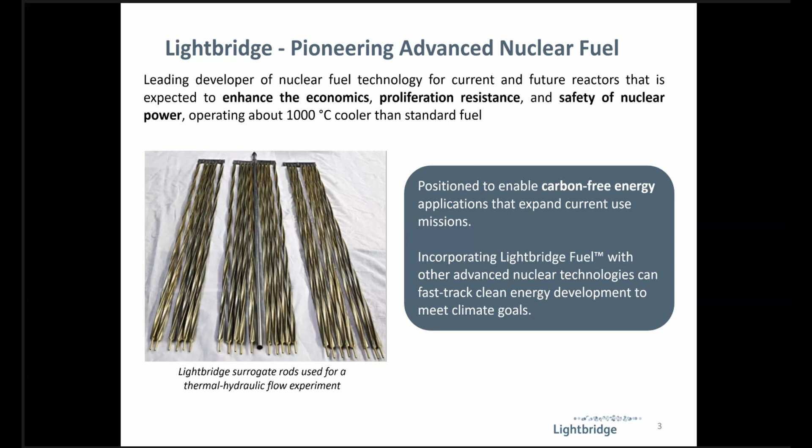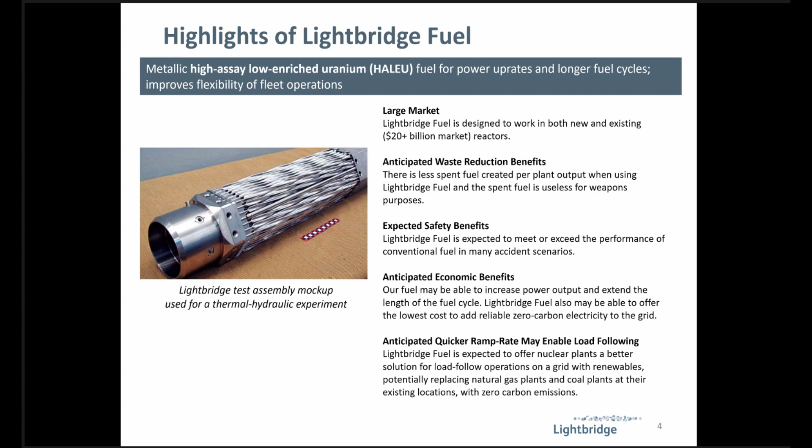This is a picture of a mock-up of a fuel assembly. We are designing for many different types of reactors—this is for a Russian VVER type reactor, a variant of a pressurized water reactor. The fuel rods are optimized for each different kind of reactor. For example, here you can see one of the rods we designed, which went through some testing. This is a cross-section of one of the rods for a VVER, where we have 3 lobes. For a PWR, a Western, say Westinghouse type reactor like Seabrook, this would have 4 lobes instead of 3, looking more like a plus sign.

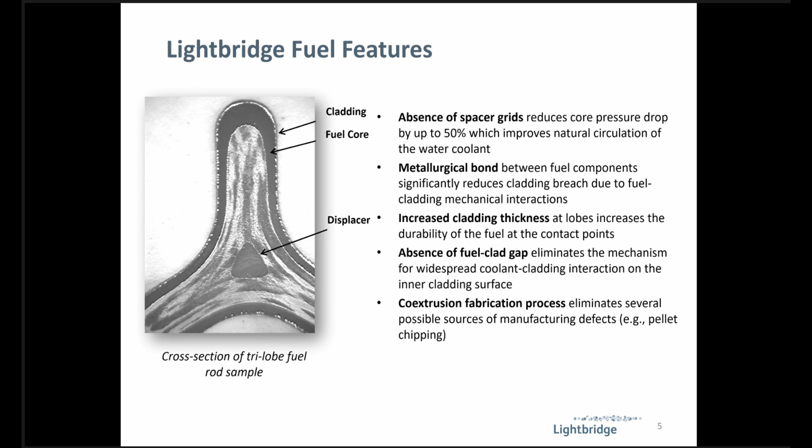One of the many benefits we've designed for is no spacer grids. To hold the rods together in the core of the reactor, there are no grid straps, no spacer grids that block the water flow. That is partly responsible for the power increase—the water just flows much more unimpeded from the bottom through the top of the fuel assembly and around again.

This shows the temperature difference down the center line of the reactor, some of the safety benefits it brings. That link on the bottom right is current on the US Nuclear Regulatory Commission's website, describing this fuel—it includes a significant increase in fuel thermal conductivity compared to ceramics, promotes lower operating temperatures, and complete retention of fission products, meaning no burst release of these products upon cladding failure. No one else will be able to provide that, in addition to safety features for the reactor that also help with radiation exposure for plant employees.

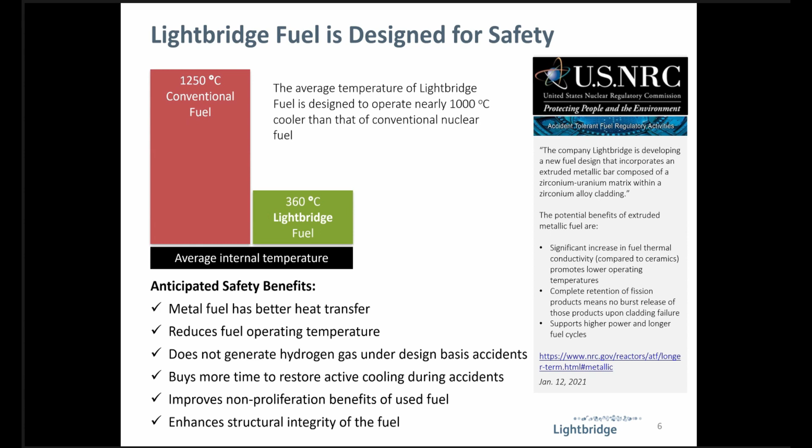And doing all this while actually bringing higher power and longer fuel cycles to the reactors. We have designed the fuel and patented it. We've also designed and patented the manufacturing methods for this fuel.

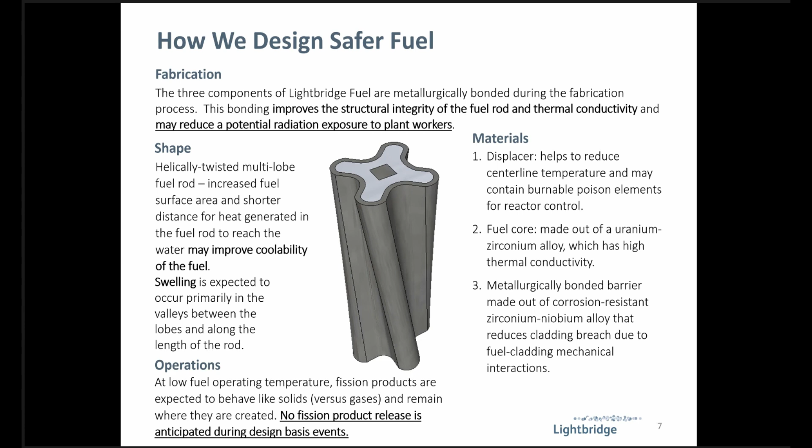As you know, capacity factors are very different for different energy sources. The renewables are quite intermittent, as the wind blows and the sun shines. Nuclear has the greatest capacity factor—think of capacity factor as if the plant can run at 100% of the time, 24 hours a day, every day of the year.

Fleet-wide, nationally in the United States, nuclear capacity factor is about 92.7%. Some of the reactors are over 95%. Virtually all of that downtime is planned years in advance for the spring or the fall when the power isn't needed as much, and the reactors can be refueled and have maintenance on them.

But the utilities want to increase these capacity factors more, including the ones we've been working with, by lengthening the fuel cycle and by allowing a much quicker ramp up from an outage to full power and a much quicker ramp down than you can do with pellet and tube fuel, which goes up and down in power very slowly. This also increases the capacity factor by getting the reactor up from outage quickly and back down into the next one.

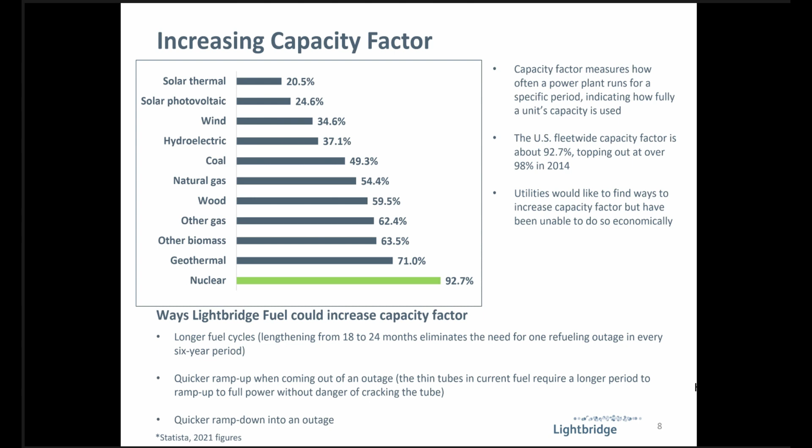And the next outage will be 24 months later instead of 18 months later. So the reactor is running for quite a bit of time that it would have been shut down for an outage. Some of our recent fuel development milestones are really centered around that.

If you want to get ahead in nuclear in the United States, you really need to partner with the US government to access facilities, materials, and receive funding support.

We announced in December a long-term strategic partnership project with Idaho National Laboratory and the US Department of Energy. We are now manufacturing fuel coupon samples that we will irradiate in the Advanced Test Reactor at Idaho National Lab.

The data will support the fuel performance modeling and regulatory licensing efforts at the Nuclear Regulatory Commission, as well as at nuclear utilities and fuel fabricator companies.

Under this work at INL, there's just about every quarter a new milestone being announced by Lightbridge, and this is leading to other developments on the commercialization path to the fuel.

The fuel can be used in all the variants of pressurized water reactors, boiling water reactors, and as we're going through this testing program at the Advanced Test Reactor and also at the TREAT Reactor for transient testing, including accident type testing, that's helping to guide the commercialization path of which types of reactors exactly first, and which reactors, even within those groups, are being prioritized for first commercialization.

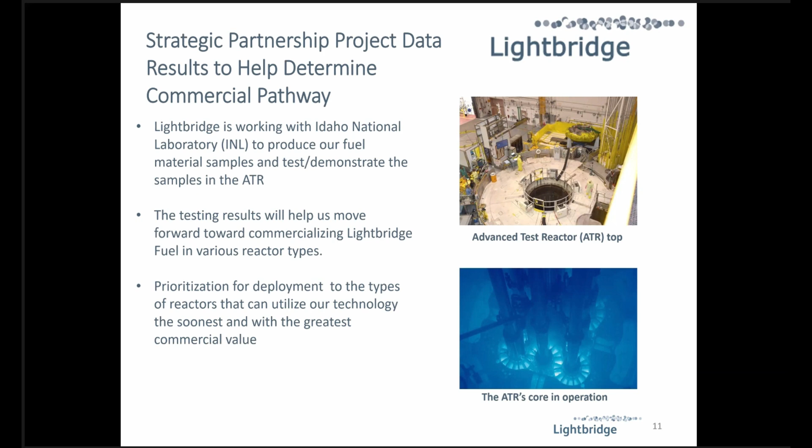The top photo here is the canal at the Advanced Test Reactor, and paths that will come from this are the pressurized heavy water reactors like CANDUs, small modular reactors, light water reactors both pressurized and boiling water, and the existing large reactors and new ones being built in several countries. And they all have advantages for why this fuel might go into them first.

For example, to use the fuel in the CANDU reactors, we would not be using HALEU. We'll use enrichment of uranium higher than the CANDUs now use, but not high assay, low enriched uranium. So for CANDUs, we don't have to wait for commercial supply of HALEU.

We will bring the benefits of HALEU and advanced technologies to the light water reactor SMRs and the large existing reactors, but that supply of HALEU is not commercially available yet. But the US government, working with allies, is very seriously working towards solving that problem and having more enrichment in the US and in allies available in the coming years.

And in particular, there's a demonstration project at Centrus in Ohio happening now, another pure nuclear publicly traded company, and Urenco at their plant in New Mexico is adding 15% to their enrichment capacity, and they're looking into adding more capacity in their European plants.

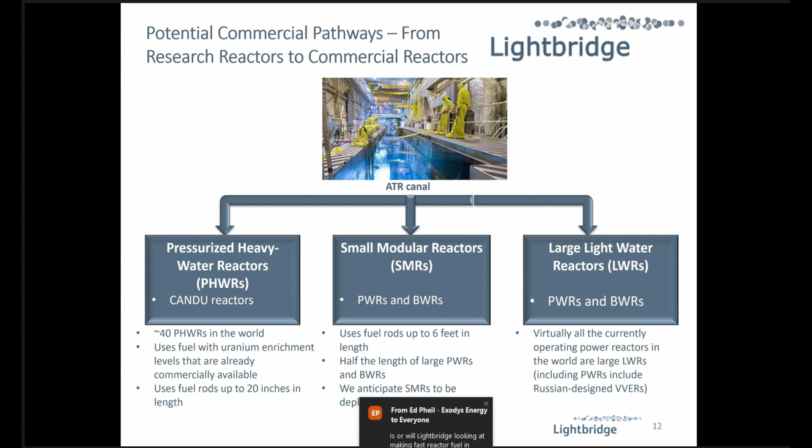One of our new and growing collaborations with the US Department of Energy is that we have a nuclear energy university program grant of $800,000 from DOE to MIT, under which MIT is studying accident-tolerant fuels for light water-cooled small modular reactors and is specifically looking at simulating the performance of Lightbridge fuel for NuScale's SMR.

We're collaborating with NuScale and with MIT together on this. The analysis is looking at promising advanced fuel forms to improve the safety and economics of light water reactor SMRs. We're glad to see MIT, DOE, and NuScale all recognizing Lightbridge fuel for that.

We have a second new nuclear energy university program grant from the DOE as well, $1 million to Texas A&M University that we announced about a month ago, that will also simulate Lightbridge fuel in NuScale's SMR.

More specifically looking at the pressure drop correlations I mentioned, at why the Lightbridge fuel will improve the economics of SMRs, we believe, quite dramatically. This program also helps train the next generation of engineering students to use advanced multi-scale, multi-physics simulation tools, and we're glad to see them learning that in relation to Lightbridge fuel in a NuScale SMR.

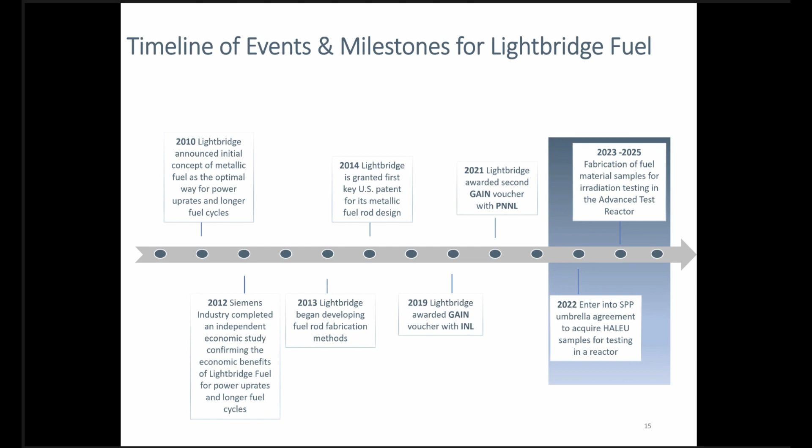So we're glad to be part of the US effort to advance nuclear technology. And Lightbridge, we believe, supported by the DOE and its national labs, will play a significant role in the global energy transition, as I mentioned earlier, really helping the SMRs and the existing reactors powered by this new fuel really meet their potential.

And the Lightbridge fuel will bring to these SMRs the same benefits that we bring to large reactors, but we believe, and this is what some of the studies going on now we think will show, that the benefits to SMRs will be even greater, including, say, for those pressure drop reasons. A lot of SMRs don't rely as much on the power of large pumps as on natural circulation, and not having spacer grids and grid straps and easier water flow, we think will make the Lightbridge fuel even better for SMRs than for the existing large reactors.

But we're glad to see, I think in some surprising ways, more large reactors being ordered and built in the world than a lot of people had expected. I think it's not going to be just SMRs going forward, although that might be the case in the United States after the next Westinghouse plant at Vogtle, the next AP1000, opens a few months from now. There might not be another new large LWR built in the US for a long time, but I think there will be in many other countries, is what we're seeing, as well as the SMRs here and abroad.

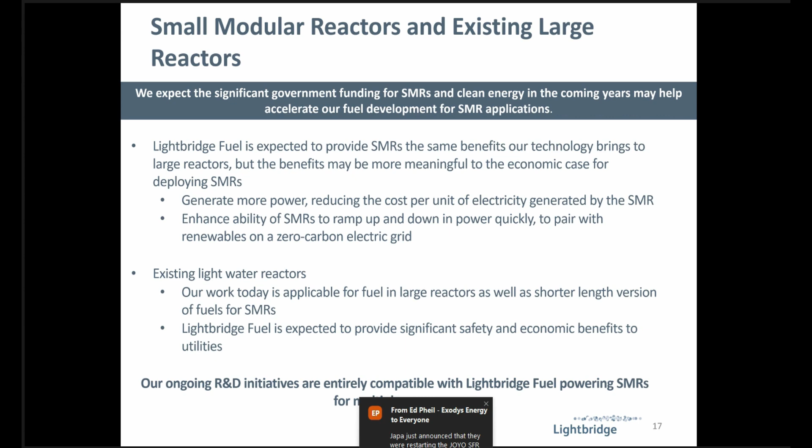And we're carefully following what they're doing, making sure that our fuel is being designed to bring significant benefits to these types of SMRs. Lightbridge is not designing a reactor. Lightbridge will not deploy a reactor. Lightbridge is just about designing and manufacturing fuel.

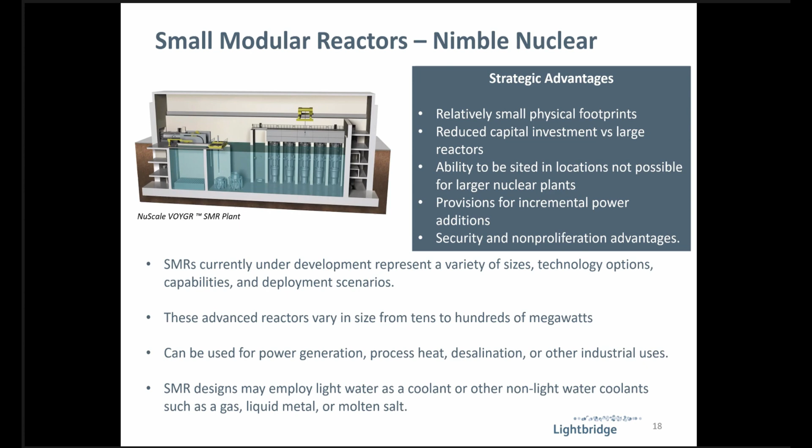And we do intend - we are looking into manufacturing these fuel rods ourselves, although we could also license the technology to companies in other places, or we could potentially produce fuel rods ourselves that are then assembled into fuel assemblies and fuel bundles by existing fuel fabricators that might want to have their own IP on the top plate, the bottom plate, other aspects of the fuel assembly beyond the fuel rods that Lightbridge is designing.

And I think that there's sort of a rollout. No one is sure of the chronology, and some of these will overlap with each other, and many different reactors within each group will be different. But the existing reactors are kind of unique in that they're an existing market of about 400 reactors around the world that could use Lightbridge fuel. If you're developing a new advanced reactor, you don't have anything around the world that could use your stuff - you have to have a new reactor built. Lightbridge has a big existing potential market as we qualify this fuel.

Going into the light water reactor SMRs like NuScale, GE Hitachi BWRX-300, Holtec, and Rolls-Royce and other SMR developers, we think that because these are pressurized water reactors and boiling water reactors with a lot of existing supply chain, and regulators like the NRC understand light water reactor technology, these will be deployed in larger numbers sooner than the next category of advanced reactors, which will probably take longer to deploy in large numbers with regulators understanding them.

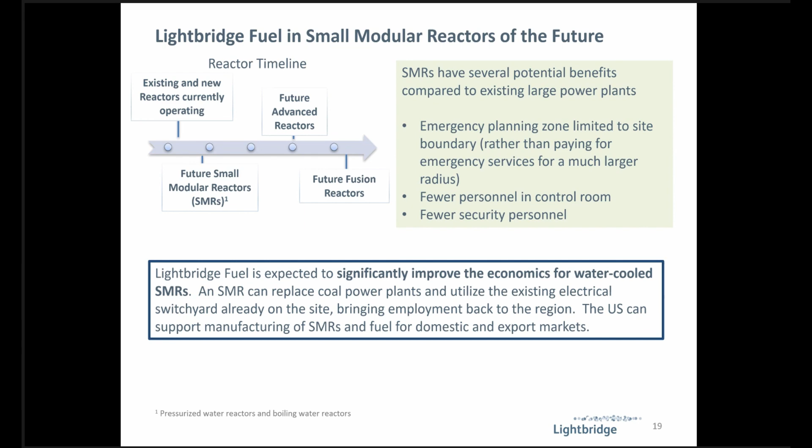This ramp rate for SMRs can be very important for points other than just the economics of coming out of an outage quicker and going into an outage quicker, and therefore having more revenue from selling more power. Right now reactors are terrible at load following, for a lot of reasons, including that the pellet-in-tube uranium dioxide fuel really can't surge down in power or surge up in power quickly. You'll crack that fuel rod if you surge it up in power quickly.

But we believe we'll show that you can, with Lightbridge fuel, in an SMR plant where the other systems are designed to take those increases and decreases in power. And we've already done some things that give us great confidence that this will be the case.

We'll talk a bit more in the next couple of slides about coal to nuclear, but really we're also getting to natural gas to nuclear. If we're really going to have an energy transition and get off emitting CO2, the natural gas plants are going to have to go eventually too.

Right now, one of the biggest drivers for natural gas plants is backing up renewables. In fact, in a lot of places with renewables, there's more power provided by natural gas than energy provided by renewables, because of the intermittency.

If we're going to get to zero carbon grids, I think we'll eventually see SMRs replace those natural gas plants, with Lightbridge fuel really being key, because unlike the current fuel SMRs could use, Lightbridge fuel can surge up and down in power quickly, like gas plants can, as the sun doesn't shine as much and then comes back from behind a cloud, or the wind doesn't blow as much and then comes back. The SMRs could really go up and down in power and load follow on a zero carbon grid with renewables, like natural gas does now.

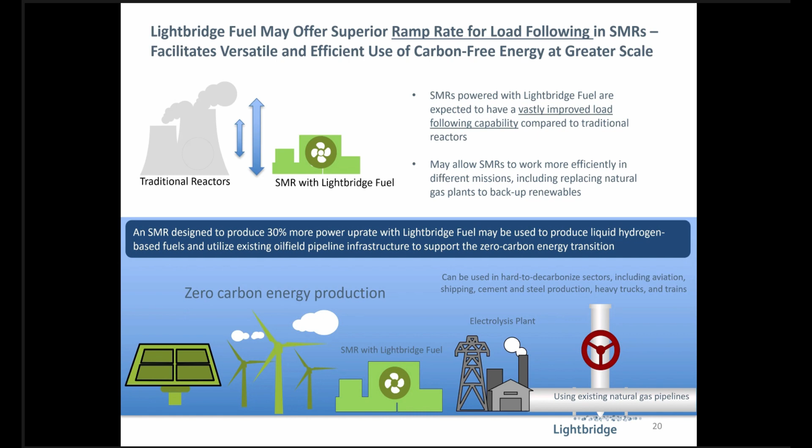This coal to nuclear transition, which I think will also lead to a natural gas to nuclear transition, is very interesting. The Department of Energy published a study in September that showed 80% of retired coal plants have the basic characteristics to serve as sites for SMRs—190 sites around the US.

If you put an SMR on each, that will be almost 200 gigawatts of electricity, which is twice as much nuclear energy as produced in the US today. So if we put an SMR on each of these sites, it would triple the amount of nuclear energy in the United States. It would be a great market, we think, for Lightbridge, and it would really help with decarbonization.

We talk about infrastructure on these sites, and you've heard this from many others as well. There's the electrical switchyard, there's the connection to the electric grid, and there's not the need to build new transmission lines like there is with renewables. There's a great opportunity for savings in putting a new energy source on a coal plant site, or any fossil fuel plant site, and using that infrastructure.

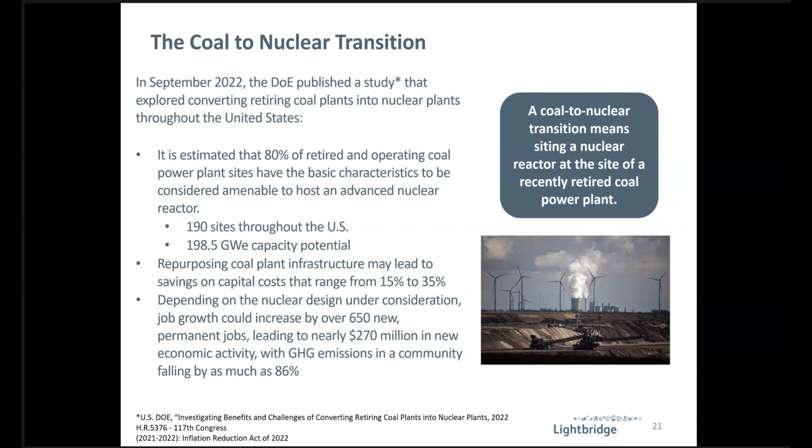And as SMR designs come along, there could even be SMRs that use the existing turbine at the coal plant and generator at the coal plant, in addition to the electrical switchyard and the grid connections there.

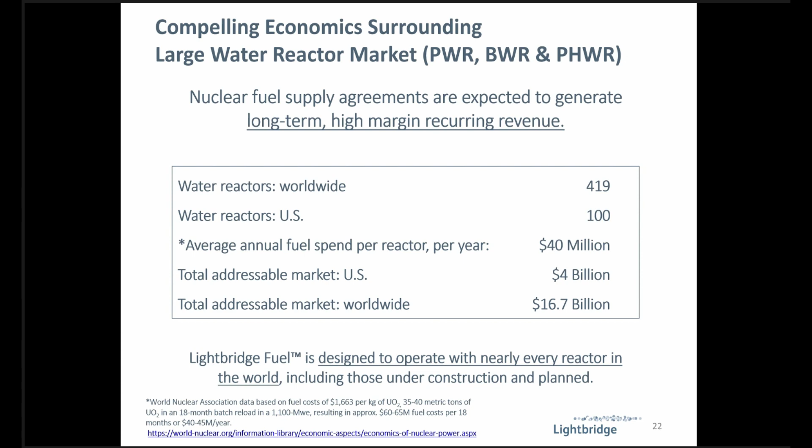We believe there are compelling economics around Lightbridge fuel. There are about 419 water-cooled reactors around the world that we believe could use our fuel that are operating now. 93 of them are operating in the US. When we think about this in terms of levelizing to a standard plant of 1,000 megawatts, a gigawatt, you could think of that as about 100 of those in the US out of about 400 in the world, with about 400 gigawatts electric in the world. The annual fuel spend for a reactor is about $40 million. So the total US addressable market is about $4 billion in fuel spend per year, and worldwide is about $16.7 billion a year in fuel spend. We think that's something that will rise quite significantly if nuclear is to meet its place in helping with the energy transition.

These numbers derive from a study that Siemens did through its subsidiary Pace Global, and some analysis from Lightbridge, on what a typical 1,100 megawatt plant, like Seabrook, a Westinghouse four-loop PWR, would benefit from using Lightbridge fuel. This is using the wholesale power price looking back 10 years, the average over that period. That'll vary by place and by time, but that's what this is based on.

Lightbridge fuel can be used in many ways. You could operate an existing reactor at 17% higher power and not lengthen the fuel cycle, or operate the plant at 10% higher power and increase the fuel cycle from 18 to 24 months. On a new build PWR, you could increase the power output by 30% for the same size core using Lightbridge fuel. These numbers are based on a typical 1,100 megawatt electric Westinghouse-type four-loop PWR uprated 10%, with the cycle lengthened from 18 to 24 months.

This is what most utilities tell us is where their interest lies. From that 10% increase in electricity production on an annualized basis, that would be about a $48 million benefit to the reactor. From increasing the operating cycle from 18 to 24 months, by operating on days when it otherwise would have been shut down for an outage and selling that electricity, that's about another $8 million a year. And just avoiding the cost of outages—going from an 18 to 24 month cycle avoids one outage every 6 years, and outages are expensive, with thousands of guest workers at the site and other costs—that annualizes to about $4 million a year. So that's about $60 million a year of benefits from switching to Lightbridge fuel, we believe.

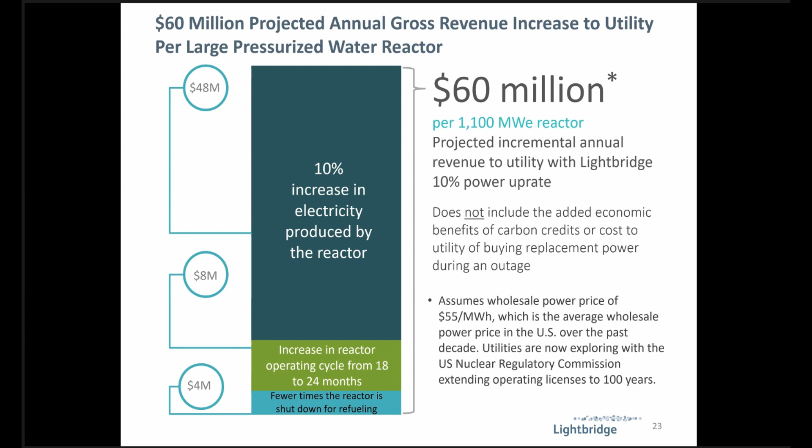And the world, as you know, is having increasing demand for energy. This demand is coming from many sources for electricity use. It's coming from the switch to electric vehicles, it's coming from data centers, it's coming from AI, it's coming from tax breaks and other incentives to switch to electric vehicles and other ways that decarbonize. I think that nuclear power is going to be essential. We will not meet this increasing electricity demand without nuclear power significantly increasing, creating a great opportunity for Lightbridge.

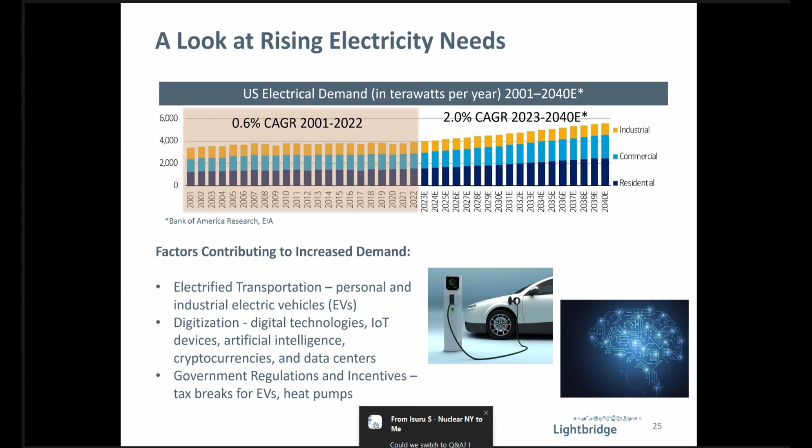How much will nuclear power increase? The Nuclear Energy Institute says that globally we'll go from about 400 gigawatts electric of nuclear power today, adding 800 gigawatts, to about 1,200 gigawatts by 2050—a tripling of nuclear power in the world. Our estimates, from looking at what the International Energy Agency and others are projecting for global energy needs by 2050, show that we're going to need 15,000 gigawatts electric, if not more, of new clean energy in the world. If nuclear were to provide a third of that, it would be 5,000 gigawatts—equivalent to 5,000 large reactors added to the world by 2050, or a lot more than 5,000 small modular reactors. Will it be 800 large reactor equivalents? Will it be more? Will it be less? We don't know, but we think there's potential for it to be tremendous—far greater than the NEI projection of 800 added gigawatts electric.

We think SMRs can be made in mass production, like Boeing produces 737s and Airbus produces A320s in factories, and then they're delivered to sites where you don't need the complex work of building an airplane. You need the work of building an airport. Similarly, if we can get to civil construction on site, like at a coal plant, but most of the SMR is assembled in a factory and shipped, I think the numbers can be tremendous. And how tremendous? Can we get into the thousands or more? I think we can.

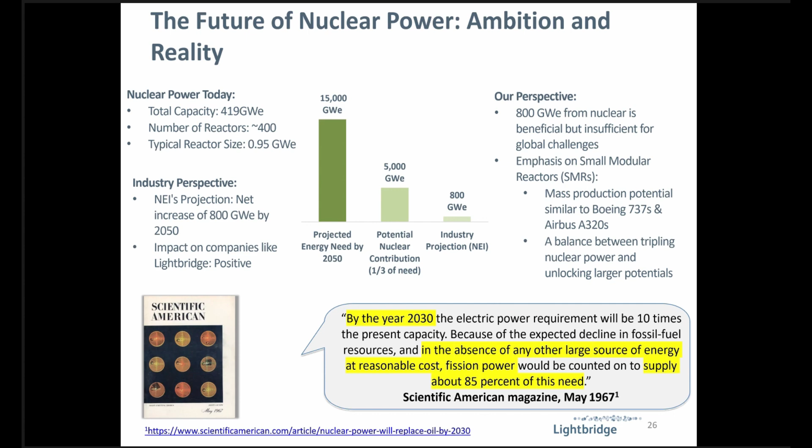In 1939, the US produced fewer than 3,000 military aircraft. On December 7th, 1941, we were about at that pace when Japan bombed Pearl Harbor. The next day, the US entered World War II, and leaders of Japan and Germany were shocked. They did not expect that US industrial capacity could ramp up so quickly on such a complicated thing. Airplanes in the US went from being hand-built by craftsmen to factory assembly line production, in some cases using Ford Motor Company sites that had assembly lines and made cars that were converted to aircraft.

We produced in the US over 96,000 military aircraft in 1944, the last full year of World War II that ended in '45. We produced over 300,000 military aircraft in less than 4 years. Just mind-boggling — so fast, such large production, and really such quality of aircraft that went to Asia and to Europe from the US. These aircraft are about the size of SMRs, the reactors in the SMRs — about the size of a NuScale SMR unit, a NuScale module.

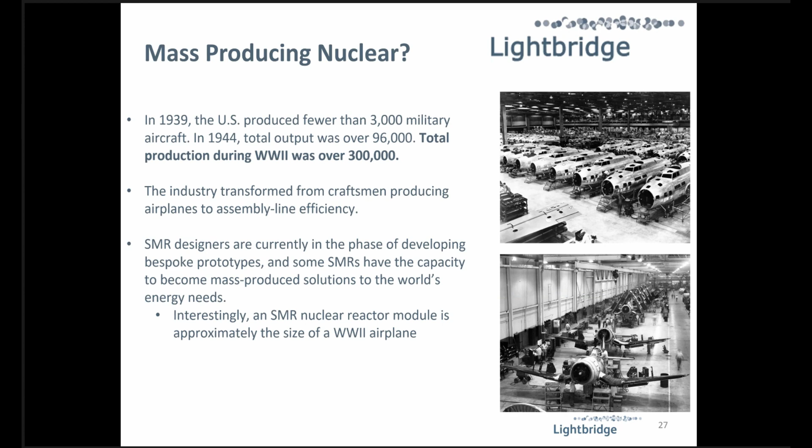I just think it's quite possible that as the energy transition is shown to be more and more pressing by many reasons, including the indicia that everyone is experiencing, it seems to be from climate change, there's going to be a tremendous opportunity for companies to mass produce SMRs as they get through their initial demonstrations that DOE is funding, and then have customers lining up to buy units.

There's also bipartisan support for advanced nuclear energy that Lightbridge and other nuclear companies are taking advantage of. Some of this is being driven by Russia's invasion of Ukraine, some by climate change. We're seeing governments in many countries and organizations comprised of governments moving very quickly — from the European taxonomy, to the UK, to Japan opening reactors that have been closed since the Fukushima accident and building new ones, the Inflation Reduction Act in the United States, the bipartisan infrastructure bill — just real, meaningful, massive amounts of money being made available by DOE, and Lightbridge is very happy to receive some of that in supporting our project.

This advanced nuclear technology race, among a lot of others producing new reactors, and Lightbridge for new fuel for reactors, poses unique opportunities for us. The government is looking at critical infrastructure resilience through nuclear and small reactors, for military bases that couldn't be cut off if the grid were taken down through a cyber attack, and for critical national infrastructure like data centers that should be taken off the grid and put on bespoke, reliable power sources like SMRs.

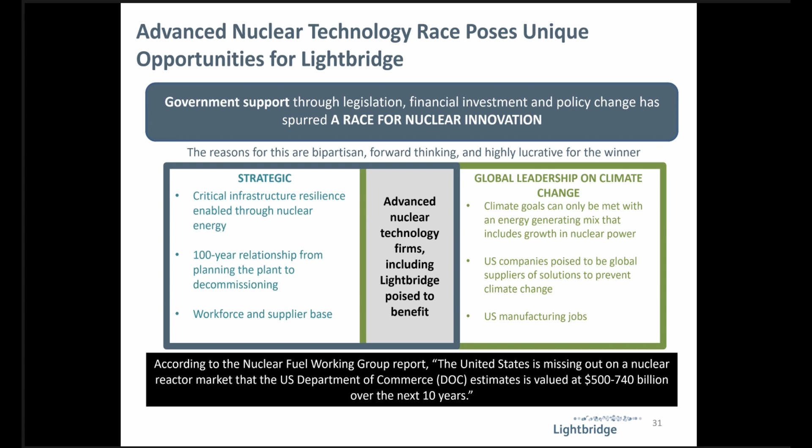The Nuclear Fuel Working Group report that I had the honor of working on a little bit with people in government said the US was missing out on an opportunity of $500 billion to $740 billion over the next 10 years, based on what the Commerce Department said. But now the government is really stepping up to make sure that doesn't happen. The US has a significant role to play internationally in nuclear, and I think we've got a real chance to do it. The Lightbridge fuel can be a real part of helping.